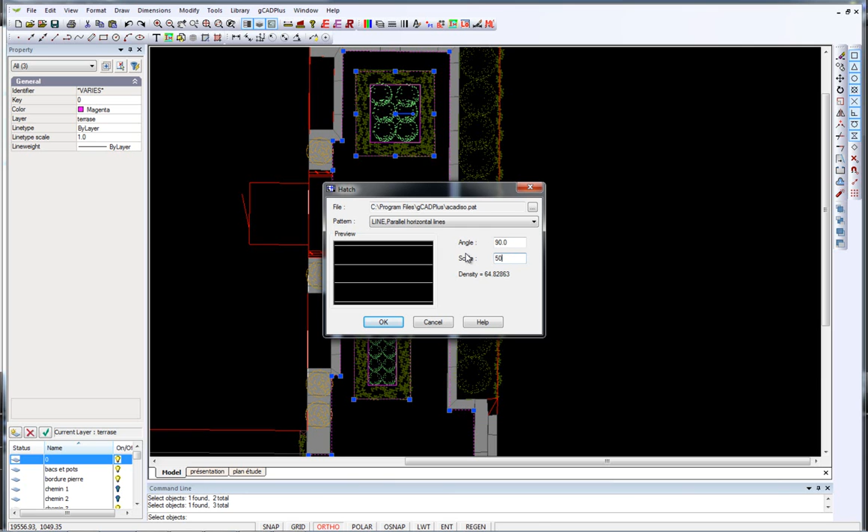So we right click, and I've loaded the hatch pattern, the ACAD, this is in the metric area, so it's ACAD ISO, and I've chosen parallel lines, and I'll set a hatch scale figure. Now this is something that you just need to play with. I'll guess at 50 and OK it, and in goes my hatching.

Now I confess to having rehearsed that 50, I did have to change on a couple of instances. So can you see that making a polyline around areas of interest works really, really well.

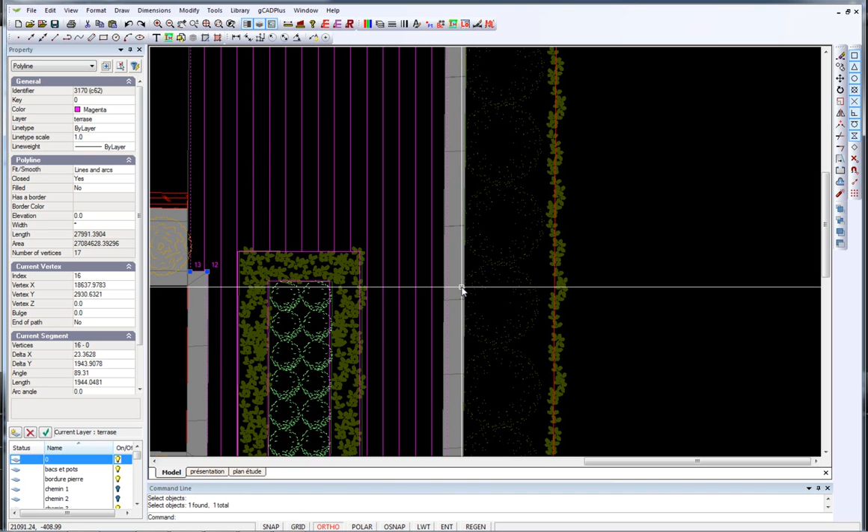Now we can do some moving of entities onto appropriate layers. I may be able to select the outer polyline. You can see the polyline goes over what will be some raised seating walling enclosing this space, and that looks a little ugly, so I could simply erase that, and now we have some nice clean looking hatching over the terrace area. So I hope that helps show how you can manage hatching very, very efficiently in the gCADPlus environment.

And save a great deal of time.

Well, making a polyline to delineate the outer zone of the decking is really quite straightforward. I've put ortho on because everything's going to be squared off, and I just follow roughly the line. I go click, and we come up to here and in there and click, and now we can close the polyline. So I'm not too worried, and you notice in the close my last polyline segment is slightly off, and that's thrown the squaring off.

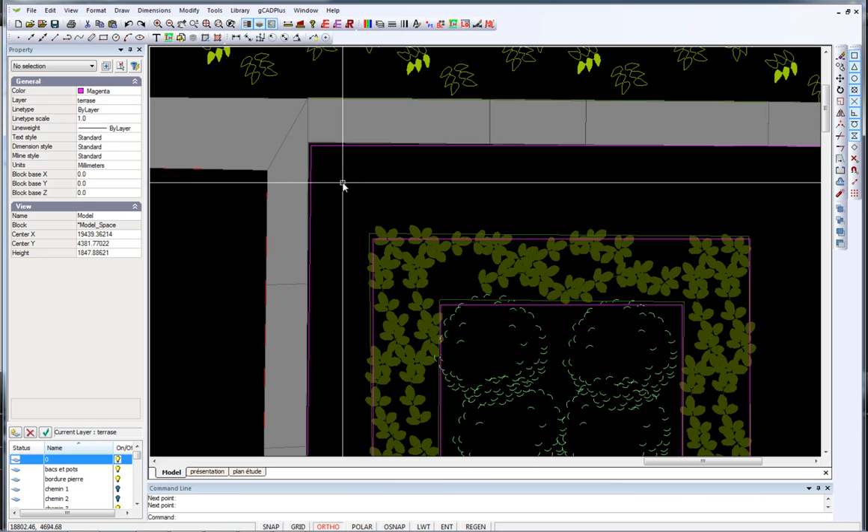We were running with ortho on, so I can actually fix that just by clicking on that handle through there and moving it into position.

Now I don't need to be at all fussy about that polyline, because once the hatching's in, I'll remove it. I just want the hatching to take place efficiently through this zone.

In order to put this second garden bed in, we can save a little time if we measure from, say, the bottom left across here, pretty close to about 1680, and if we come up here, we've got about 1900.

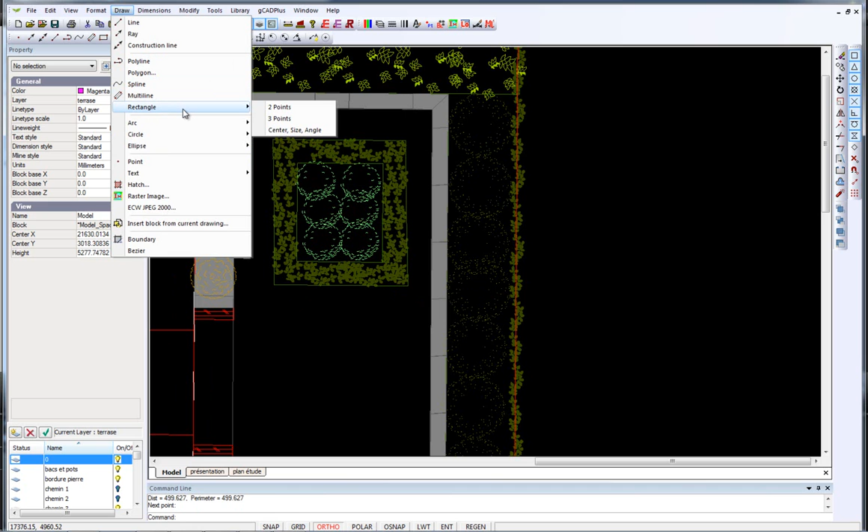So if we draw a rectangle with 2 points, we can specify the first corner point here, and we can use the at nomenclature, at 1680 in the X, comma 1850 or 1900 in the Y.

We'll get a rectangle sitting just where we want it. So that saves just a little time, and we'll be consistent.

We'll offset that rectangle. It's a polyline that saved us having to draw the individual lines, so we can modify and offset the polyline and then just indicate the size, because if I right click now, see that the distance is in fact 300, so we can just indicate the size, and there we have it.

So we've now two polylines. I'm not interested actually in the inner ones, but two polylines setting off what will be the planting beds within the decking area. So the next step is to draw a polyline around the outside perimeter of the space.

Well, once you've drawn the shape you're after, and if you've drawn them as individual polylines, as I have done here, what you then want to do is select them all, right click and join. Now we have a polyline denoting that space.

We could use the offset command to offset the polyline to get the internal space. So before we do that, let's just check on the distance from there across to there. So it's 308. So if we offset the polyline by 300 mil, we'll have a 300 millimeter planting zone for the outer planting.

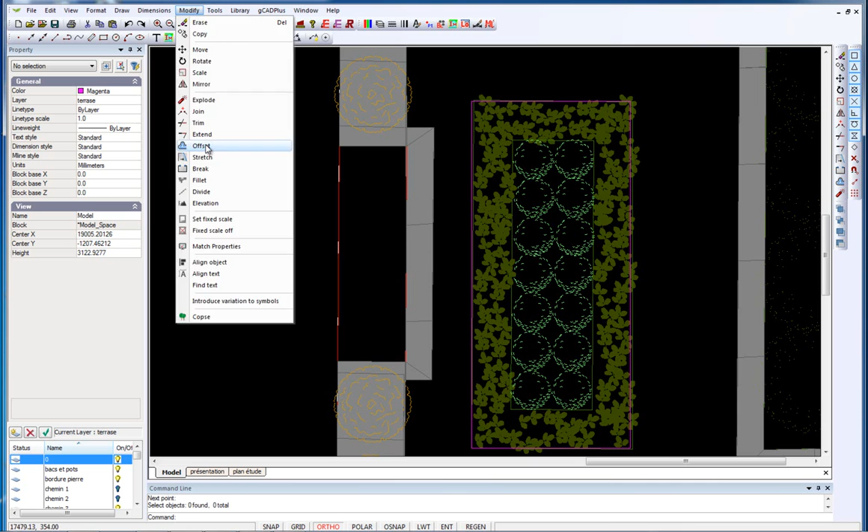So modify, offset, select the object to offset, and that's the polyline that we've just drawn, and we're asked for us to specify a through point. Right click at that point and pick distance and then type 300. Once that's done, you can indicate the inside in this case, and the offset is done.

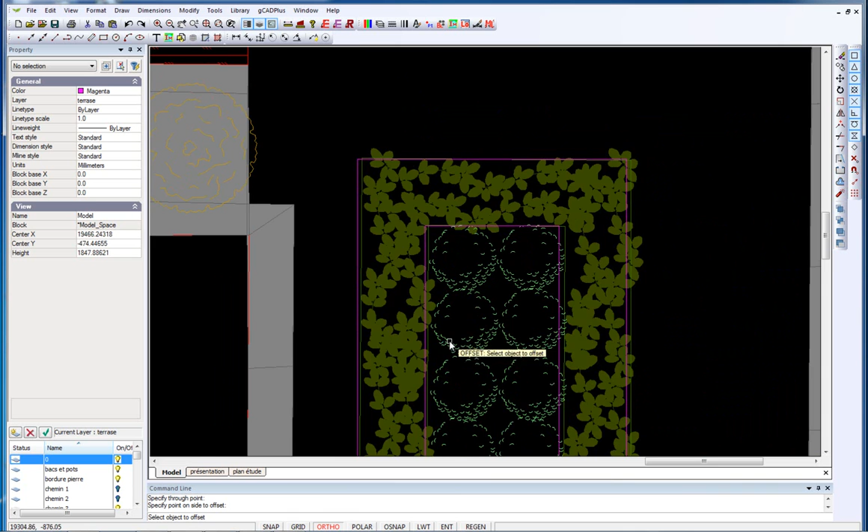So we've now got a polyline in the area that we want. We're more interested in repeating what we've just done with this garden bed area through here, and then we need to draw a polyline around the inside of the space because that's the area that's going to be hatched.

I've changed the drawing colour to magenta, so let's put a polyline around this garden bed and square it off. So it's draw, polyline. We'll come over here, pick the snap tool and start at the same point as the original drafter had done. We'll type 1200, so we'll go at 1200, angle of 0. I've got ortho on, so I could simply have typed 1200 and hit the enter key.

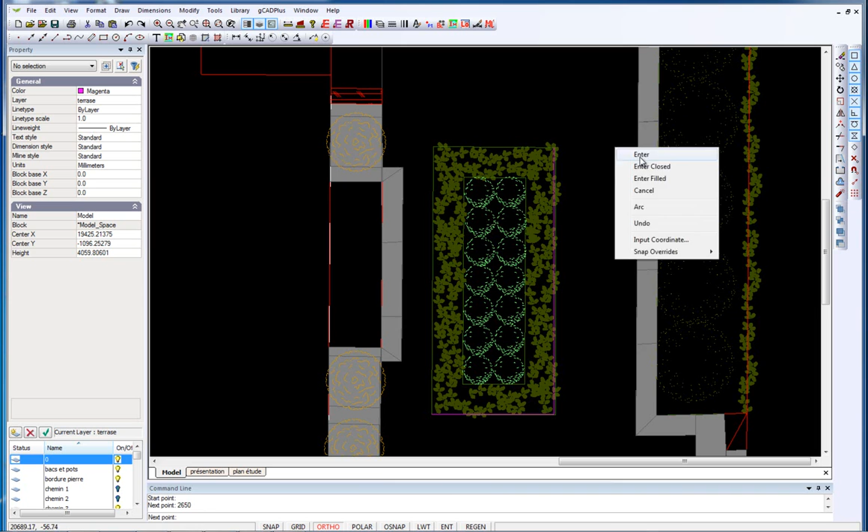Now there are a number of ways that I can continue here. I could offset this line to the left and then offset that line up the same distances, but I'm sure you're able to manage that. What we want to end up with is a polyline around that space.

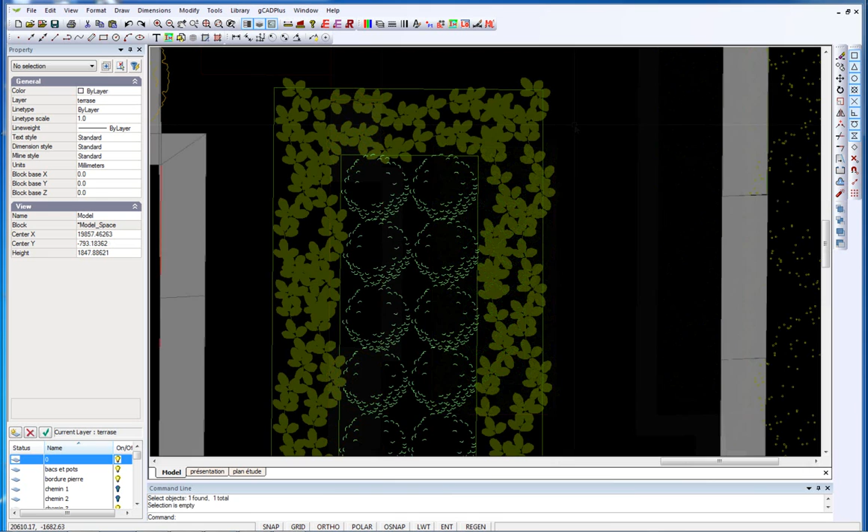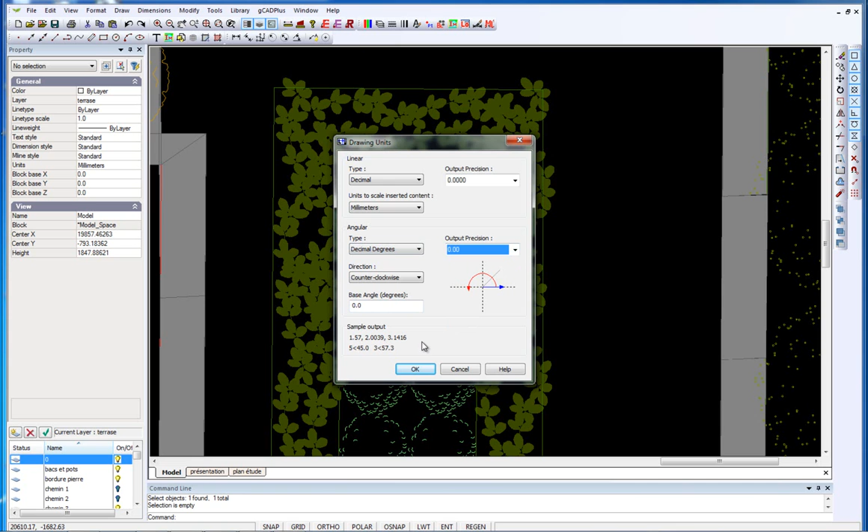If I go to the format and units, you notice here that under angular, decimal degrees, as I picked the drawing up, the output precision was 0, and that line was showing 360 degrees, but let's change that to 2 decimal places for angular, and OK.

Now let's just pick one of those lines which slightly annoyed me because it wasn't quite horizontal, and you can see that the angle is 359.57. So this little planter bed is just slightly skewed, and that, as I said, offends sensibility. We really want to fix that up.

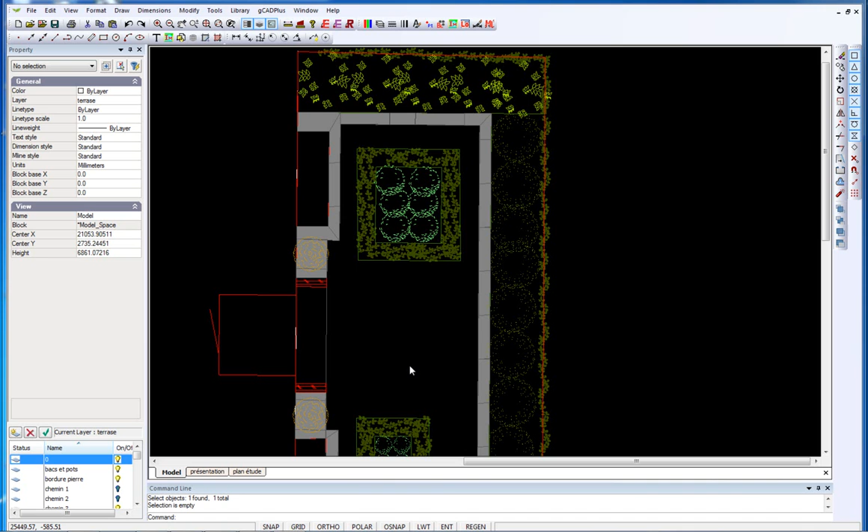As a first step, I'll turn off the layers that hold the existing hatching and turn off the layers that show the existing path, which is going to be overlaid by the new hatching. I've created a new terrace layer, and it's on that terrace layer that we will put the new hatching.

What I'll be doing is to draw a polyline around the outside of the zone that is going to be hatched, and then a polyline around the inside of the zone. If I zoom in on this line here that shows that particular planting area, you may notice that the angle of one of those lines is a little off. It shows just a small kink in it.

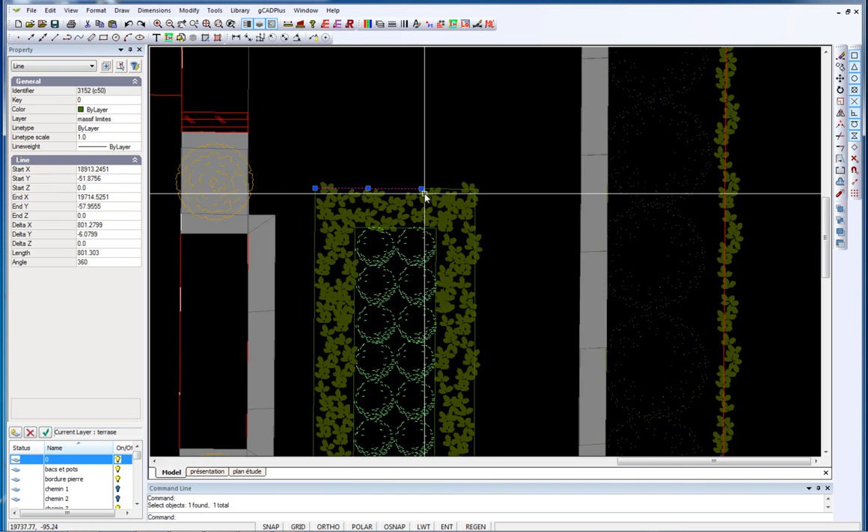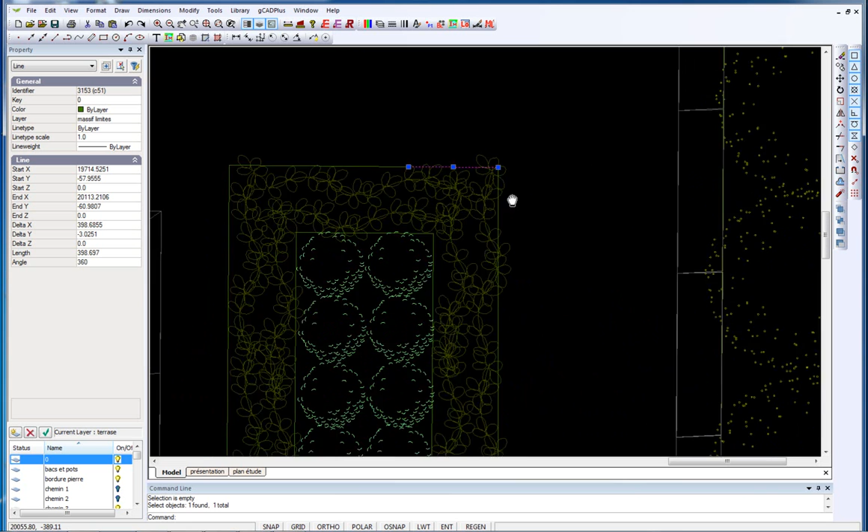So let's just explode that line and pick it again, the individual line. That's interesting. That angle is 360, but there's a little line here which is also at 360, but there seems to be some sort of angle to it, and the length is 398.697. So I'm not quite happy with the way that rectangle's been drawn, and nor the inner rectangle as well.

And I'd just like to have a look at the units command, and it may well be that the units in this drawing are not set correctly, and there might be just a small angular difference which is enough to throw the presentation of that line off.

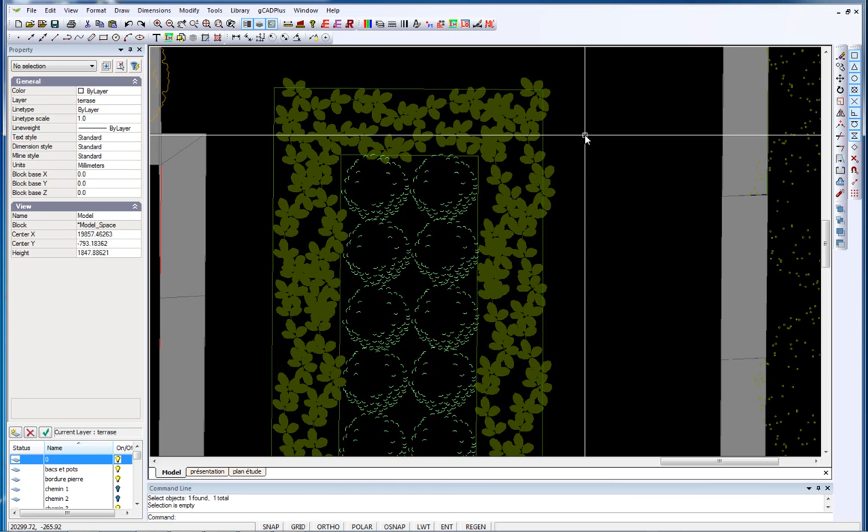This design calls for a boarded area, a decking area if you like, through this zone here, and that's going to replace the white outlined areas which represent an existing path. So the path will be removed, a decking built above those paths, and some seating placed around the decking area, and some planting within or cut through the decking area.

So we'll need to put some hatching in, as been done here, to represent the decking area. But if I select the individual lines of hatching, can you see that the hatching's been done with lines, and gCADPlus offers a much more efficient way of putting hatching in rather than draw individual lines. That becomes a very tedious exercise, so we want to do that more efficiently.